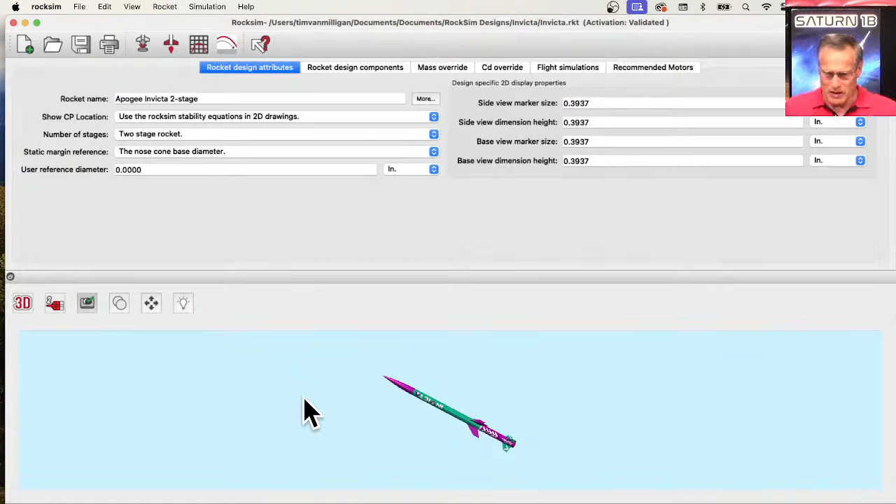You can see that it opened the design, and down here is the length, diameter, and fin span, and the mass of the rocket. If you want to see it in 3D, come down here to this button, select that, and it will re-render the rocket in 3D. With your mouse, if you have the trackball on—check that trackball button—you can use the mouse to move it around and look at it from any angle. If you want to zoom in, I'm using the scroll wheel, scrolling in to zoom.

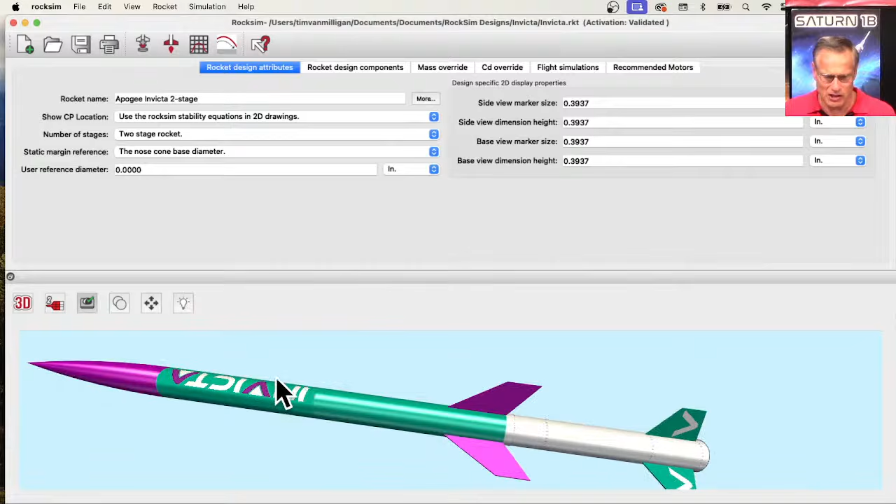If you want to shift it to the right or left, you hit the shift key and slide it with your mouse—I'm left clicking and sliding. Otherwise, you can rotate it around. You can see it has to re-render; my computer is really slow, it's getting old, I really need a new computer.

I still have the Intel chip, and now Apple is on the M4, which is like 4 newer versions than what I have. So mine is getting really old—that's why it's slow.

Anyway, we want to add a part to the database—he says a materials database. Let's say we've got a new material we want to make a fin out of, and I don't know what it is—Hollywoodium, the stuff they use in Hollywood. So we're going to make a new material called Hollywoodium. You go up here to the rocket menu, come down to Edit Database, and go over here to Materials. This is where we're going to add the new material—make the spinny ball go away. Here's all the materials currently in the database.

Let's see if I've used Hollywoodium before. Nope, there's no Hollywoodium.

To add the new material, we're going to click the Add New button right here. It puts a new line on your chart, but right now it's not showing because it's at the very bottom. So if it doesn't show up, scroll either all the way up to the top or all the way down to the bottom. This is where you're going to add your new part or new material, so I'm going to type in Hollywoodium.

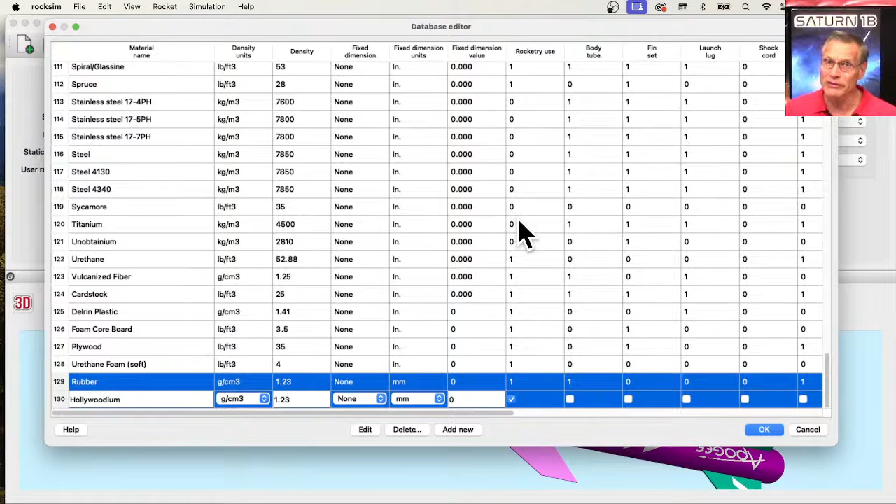So why would you not want to use it in your rocket? Well, the easiest way to delete a material from your database is to just go here and uncheck it, and it turns it to a 0. At that point, you can't use it in your design. Like here, I have titanium, but it's a 0, so it's not going to show up in any lists inside of RockSim. This is the fast way to turn things on and off. Since I want to use it, I'm going to turn it on.

Now you're going to select what kind of components can be made out of this material. So Hollywoodium - I'm not going to use it for a streamer, so I'll leave that unchecked. A transition section, maybe. A parachute, no. Nose cone, yes. Shock cord, no. Launch lug, maybe. Fin set, yes, definitely. Body tube, yes.

Let's see what other columns we have here. We have rings - I'll say yes, yes. Engine block, yes. Sleeve - a sleeve is a tube that goes over the outside of a tube, as opposed to a coupler that goes on the inside.

Okay, so now we have just added Hollywoodium into our parts database, or the materials database. So then we'll click OK. And now let's use this new material.

I'm going to go to the designs, and I want to make this fin here out of Hollywoodium. I'm going to click on it, and I got the spinny ball. Okay, so it selected that fin.

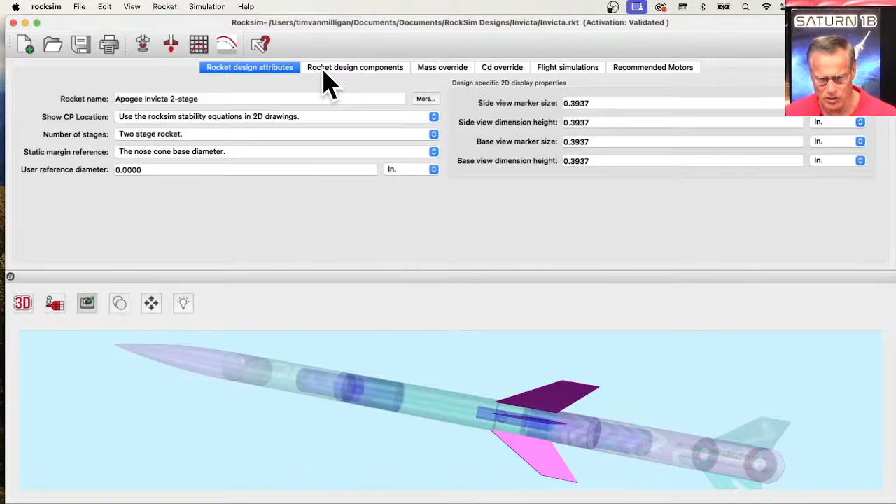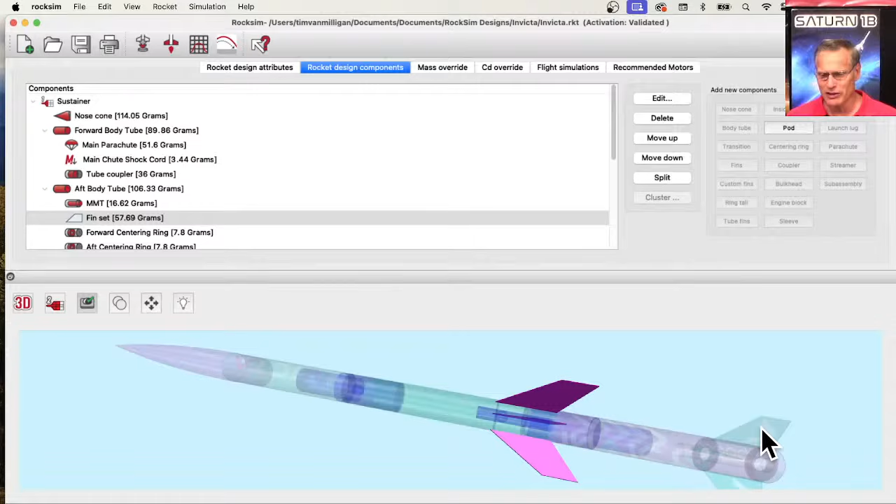Once it's selected, you can go to Rocket Design Components, and you can see it highlighted one part, and that's the part it highlighted. So if you can't find an item in the parts tree, because sometimes you see this giant list of parts and don't know what they are, you can go down to the rocket and say, I know that's a fin, and if I click on that fin, it will highlight the fin in just a second.

My computer's really slow, did I tell you that? So it highlighted the fin, and then it will highlight it in the parts tree as well. So then I can go to the parts tree and just double click on it to open it up.

And it's still working on it. Come on, still working on it. My computer's running really slow. This is my computer, it's not RockSim. RockSim is blazing fast, but when I'm trying to run the live stream and RockSim and YouTube, it's like running really slow. It's not in the back, it's kind of like hung up. Don't do this to me, RockSim.

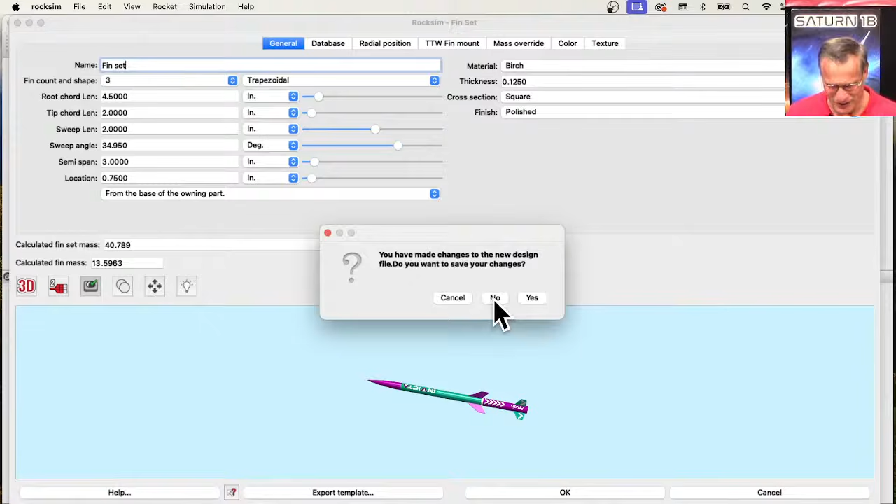Because I've just changed it to Hollywoodium. Let's see, do I have to force quit? Let's see if it's running. It says it's running just fine, but it won't let me click on a button. Anyway, I'll quit, let's see if it'll let me quit. Oh, and then as soon as I quit, it opened up the fin. No, let's see if I can hit no. Okay, so, oh, and it quit anyway. All right, let's open it up again.

The question is, does it remember that I added a part or a material to the database? Okay, so file, open. I need a design. Invicta, open.

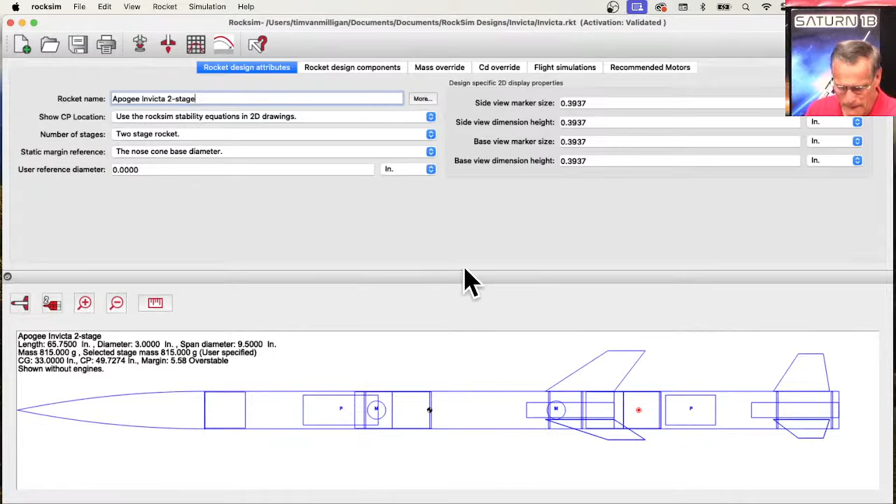Okay, rocket design components, fin set. Let's see, you're gonna open for me. It still wants to be slow. There we go. Okay, so this is the fin, I'm editing that bottom fin.

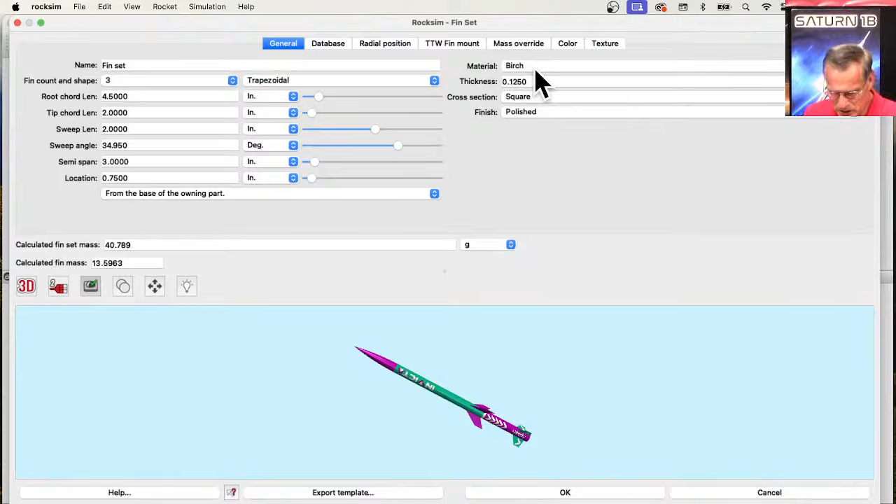And right now it's made out of material called birch. So if we click on the material and we're looking for Hollywoodium... I don't see it. Oh, there it is at the very bottom, Hollywoodium. And you're not seeing that because you can't see the bottom of my screen. But if I select it, okay, so there it is, Hollywoodium. It did select it.

Oh, and I just switched it to aircraft plywood, Hollywoodium. Okay, so when you select that, it will recalculate the mass of the fin. So now it's calculating it at 73.69 grams. And if we choose, I think it was rubber that we had before that I matched the density to. I thought it was rubber. Maybe I'm not allowed to make fins out of rubber.

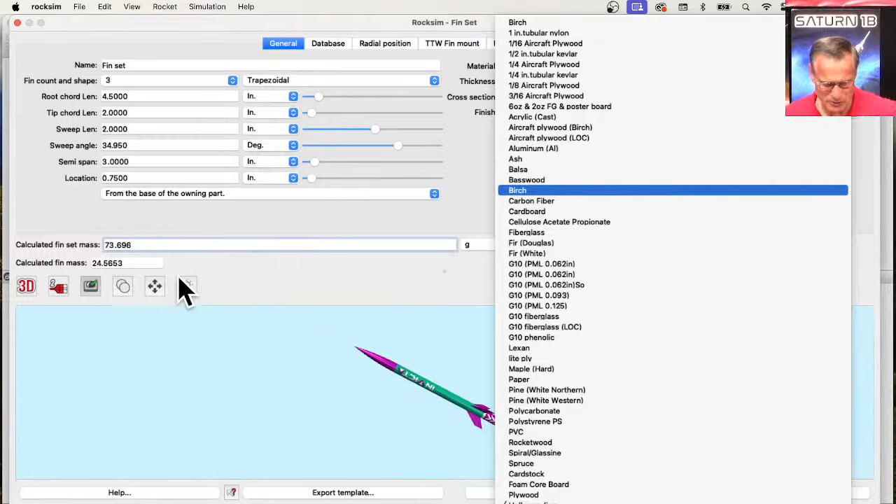Birch, let's see what birch is. Just watch the calculated fin set mass, see, it just recalculates it. So yes, it's working, at least I think it is. And then you can click OK.

Yeah, so hopefully that answers your question on how to add a material to the database. I don't know what material you're adding, but that's how you do it. This is running so slow that it's even making me mad.

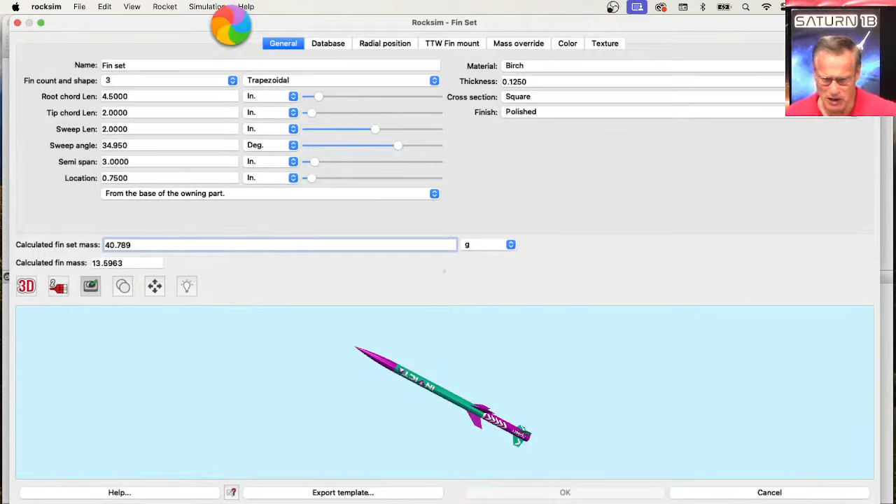Carlo says, has anyone emptied an aluminum Michelob Ultralight bottle and dreamed of using it as a lightweight fuselage? Well, there you go, you could make an aluminum rocket. And he says that Michelob Ultralight bottle looks like one of his graphite competition models. Cool.

And Rick DeFossis says article 583 has a pretty cool article. What's 583? Let's go find out, I bet it's one that Rick wrote. So we want to go to Peak of Flight newsletter, all newsletters, and then we want 583. So we scroll down to 583, motor options for clustered rockets. I think Rick wrote this one. Yes, he did, our very own Rick DeFossis wrote this article for us.

In fact, the newsletter that I was working on was referencing this article. So Rick, you get another thumbs up because I linked to it from a newsletter that's going to come out at the end of this month, I think it's the 26th. So thank you, Rick, for writing this article. Yeah, this was the one. All right, well, that's cool.

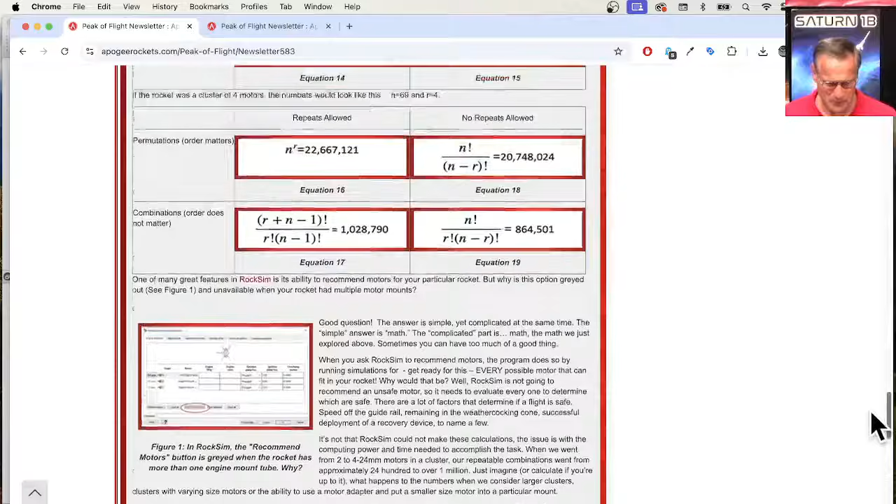I got no more questions from people about RockSim. So what's on your mind?

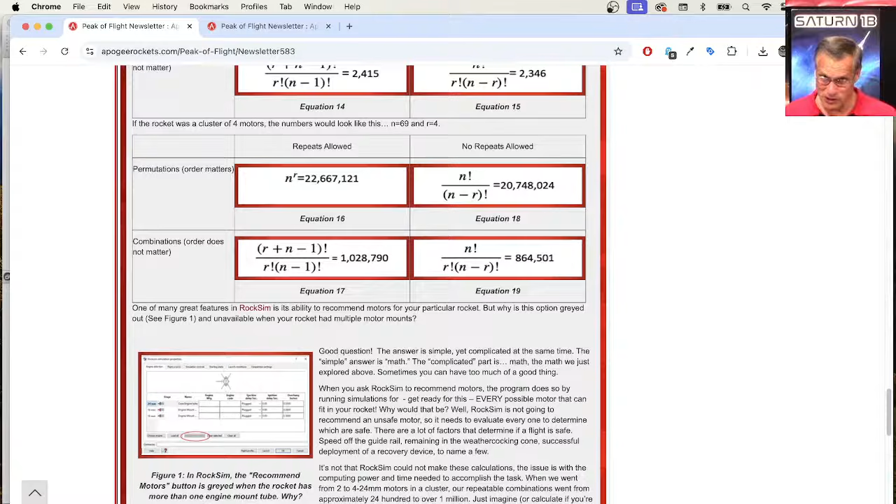Yeah, so what can I show you? Let me open up RockSim Pro. Let's see, I got a new version of RockSim Pro, and I'm still testing out some of the new features.

Quit RockSim. Do I want to save my changes? No. RockSim Pro is still launching here, still bouncing on my screen.

I'm trying to figure out what new features we've added since the last release of RockSim Pro. We're working on a lot of stuff, like canted fins, canting them at a specific point in the flight. I think I talked about this maybe an episode or two ago, and it wasn't quite working correctly, so we didn't release it yet. We also added a feature to calculate the fin flutter velocity, which is important, which is why we don't make fins out of rubber, because they would flutter too much.

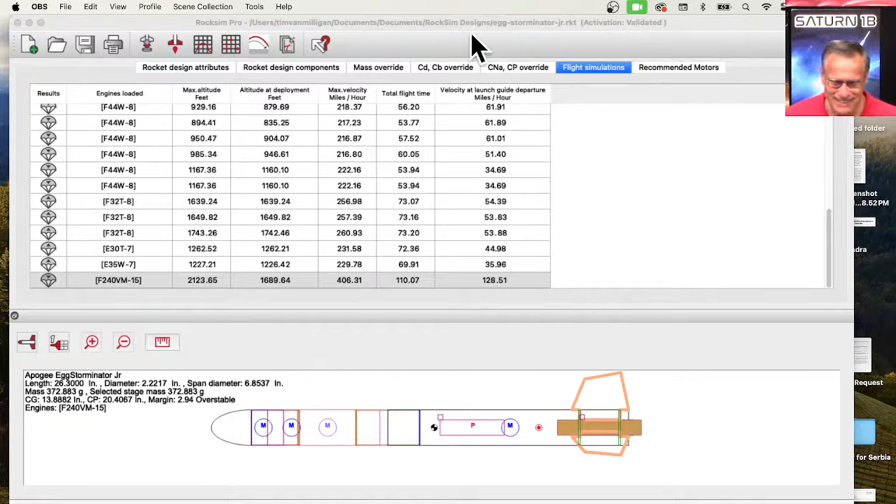So what I showed you was under the fin set, we have this new fin flutter calculator, and you tell it the maximum altitude that you're going to fly to, and it will tell you what the fin flutter speed is. I'm in miles per hour here. So at this altitude, I can't exceed 292 miles per hour, or there's a good chance the fins will flutter off.

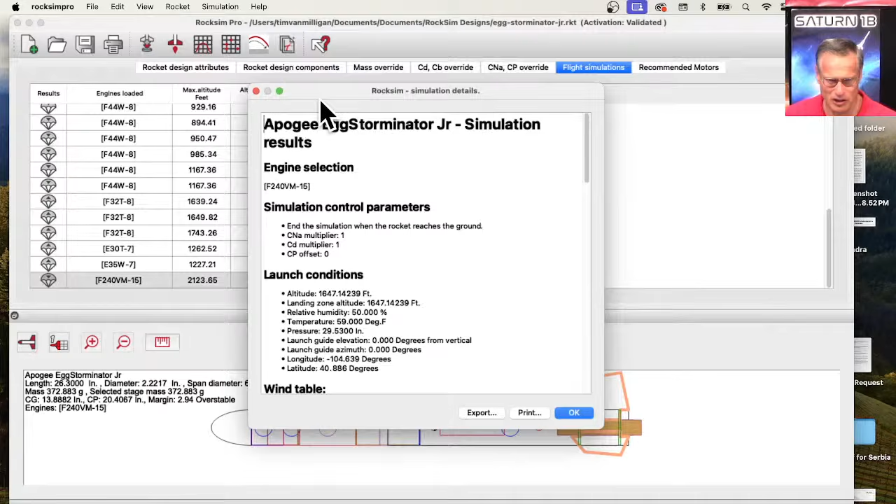And then I ran a simulation, and it looked like a normal flight. It went up and came down nicely. Then I went to the flight simulations, and I came down here and went into the detailed flight report by double clicking on it. This gives a lot more information about the rocket, and what I was looking for was a note saying, hey, my fins fluttered off. I don't see any. I did have some uncertainties.

But this is in RockSim Pro, not in RockSim. Let me see something here, what was I just thinking of. Oh, I wanted to turn off my uncertainties. I had them turned on because I was working on another newsletter article about uncertainties. Uncertainties let you change various parameters and run what they call a Monte Carlo simulation, where you set your initial conditions and then start varying things.

You can vary the direction that you launch the rocket, and you can vary the angle. Here I'm varying the coefficient of drag. But if you don't want to vary it, you set it to 0%.

So all these are set to 0%. The launch guide elevation angle, if I did 12 degrees, that's the only thing I want to change. And then how many simulations I want to run — let's just run 10 and see what happens.

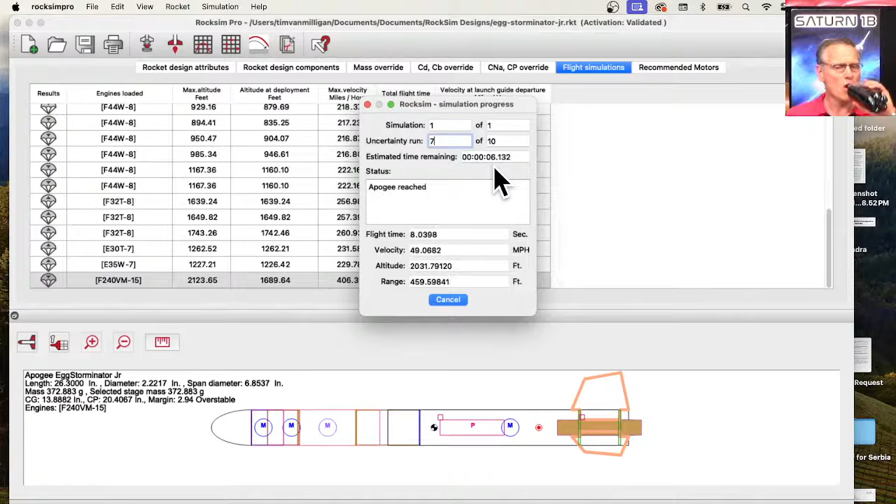Okay, so nothing really changed as far as the maximum altitude or anything. But the thing about running multiple simulations in RockSim Pro is you can do a plotting graph.

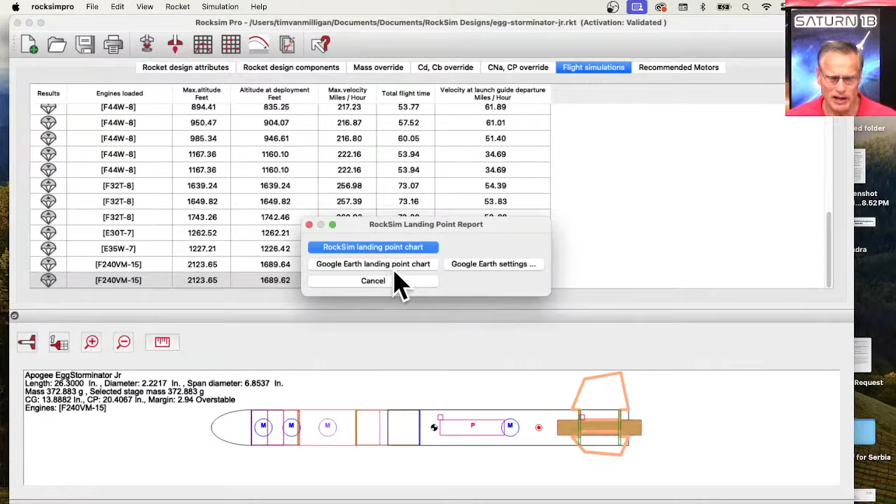And you can do either a RockSim landing chart or a Google Earth landing chart. So this is a scatter plot, and it tells me, just by varying the launch angle,

where it's landing. So the launch point is the yellow one right here in the middle, and the nominal landing point is right here.

And it looks like it's really scattered a lot, but in actuality, going from left to right, it doesn't really vary much, but it does vary distance-wise.

I had no wind on this simulation — I believe I had no wind. And so launching straight up, it landed right here.

And why didn't it land right there? Well, because the Earth is rotating underneath, and RockSim Pro accounts for that. So it landed just a little, 0.05 feet away.

So you can see going left to right, we're not going very far, but because we angled the launch rod and we used a big motor, the rocket goes really high.

You can see it could come down over 1,200 feet this direction, and 1,000 feet in that direction. And if you click on these points, it will tell you what had to happen to get to that point.

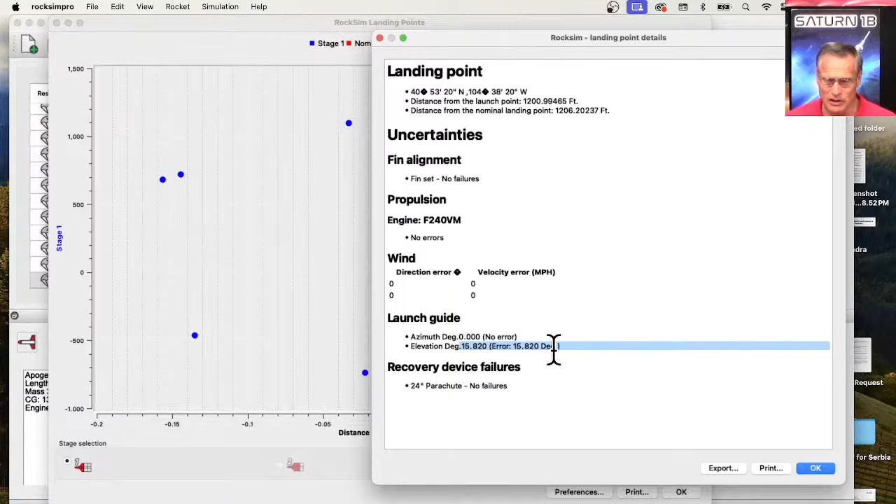So if I would have launched at an elevation of 15.82 degrees from vertical, that is the point I would land at. And if I clicked over here, this one is a minus 6.11 degrees.

So the launch rod is angled in the other direction. Like I said, this is like a Monte Carlo simulation, so you don't get to pick the numbers, but you get to kind of pick the range, and it just randomly picks numbers in there and runs the simulations.

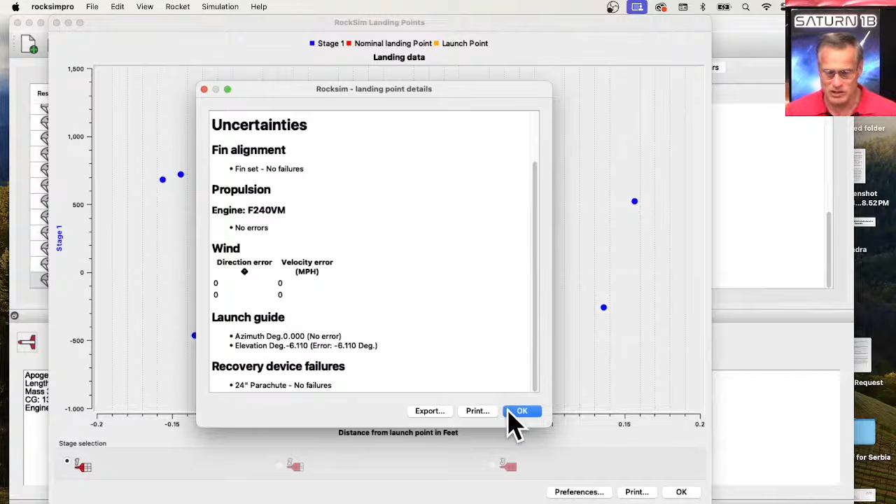And I only ran 10 simulations, so there should be 9 blue dots and 1 red dot to show the simulations — or maybe it's 1, 2, 3, 4, 5, 6, 7, 8, 9, 10.

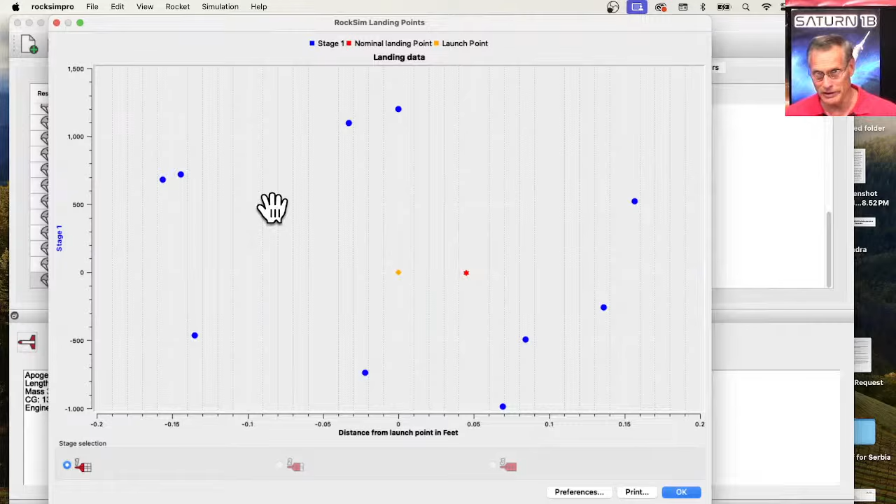So we got the nominal condition and then 10 uncertainty conditions.

And you can also, if you want — let's see if this works. I need to launch Google Earth.

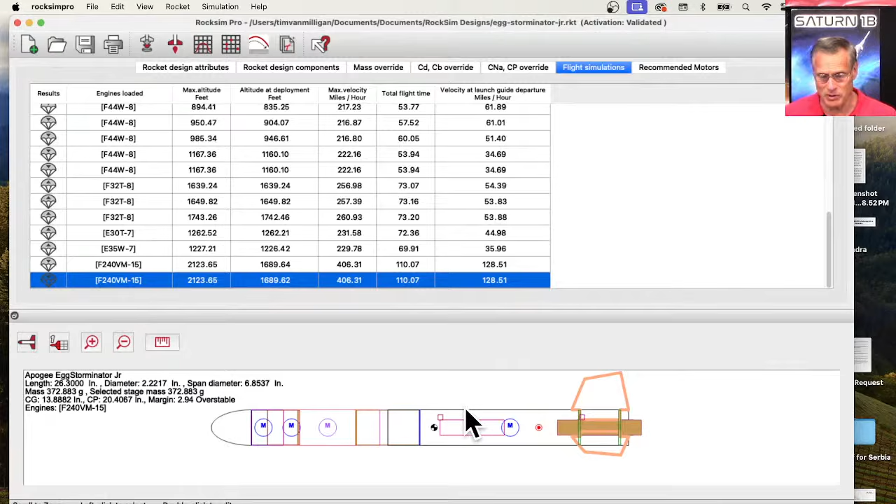You can also see the simulation in Google Earth, all those plots. So it should be like the launch visualizer, but instead of being inside of RockSim, it will be in Google Earth. And Google Earth, you can download that from the internet — that's free.

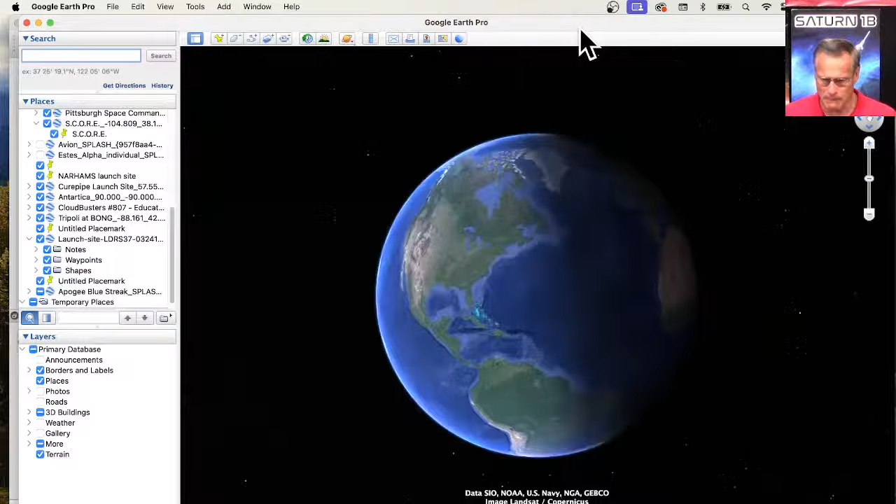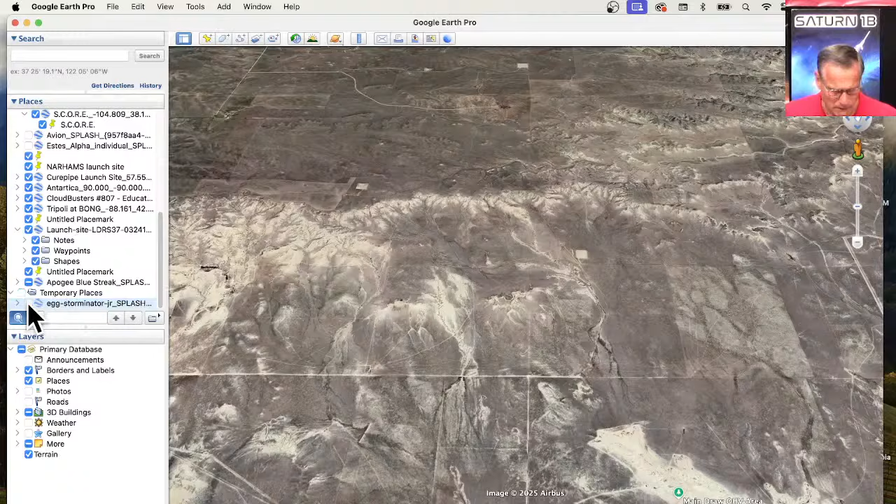Okay, so again, that looks very much like what we saw before. Why won't it let me click on these? Okay, turn them on.

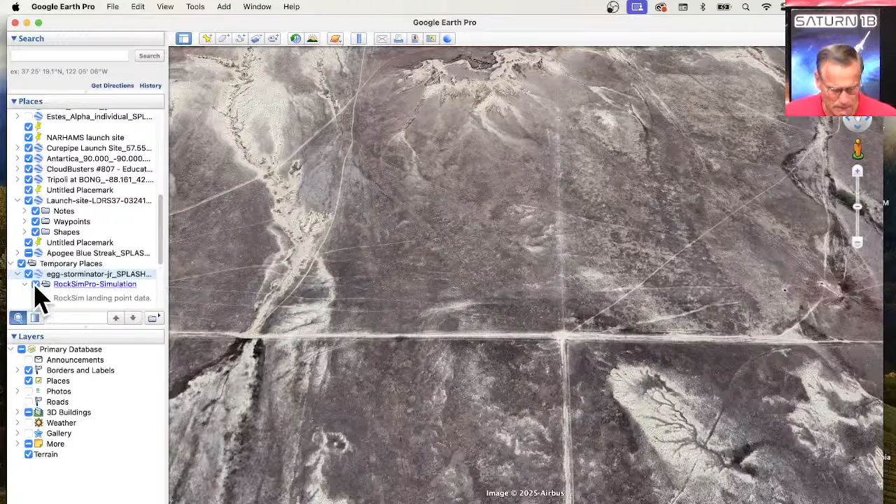And why am I not seeing these? Yeah, okay.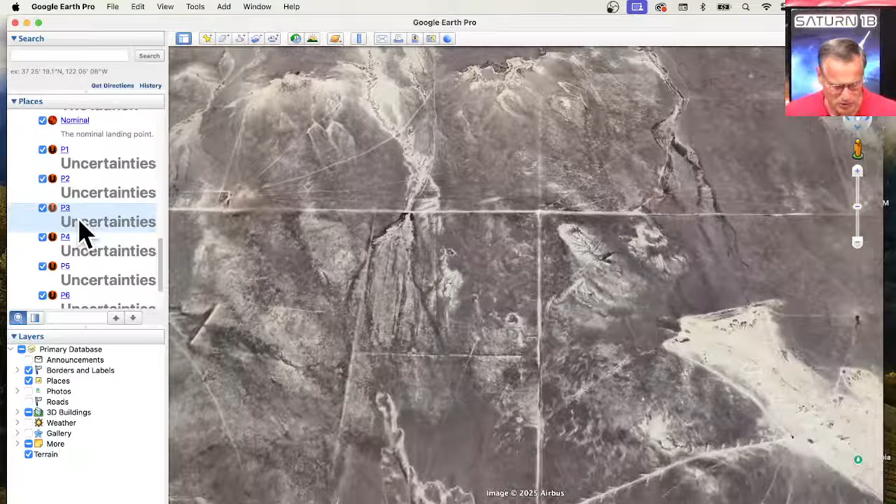Here's the nominal launch. Am I in the wrong location? I am in the wrong location. So there it is, right there.

So that's the uncertainty point number 3. And if I click on it, it brings up that same information, showing the error of 14.35 degrees off. Let me zoom out.

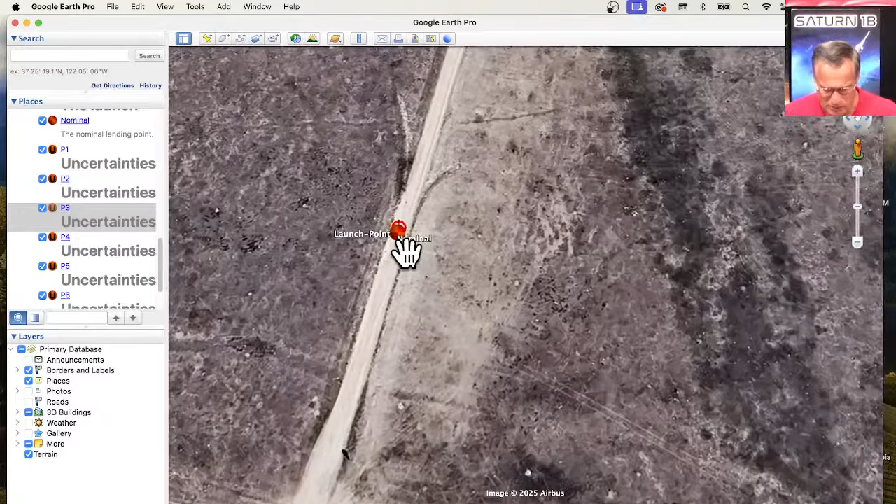Yeah, so this is the launch point, and that's the nominal landing point. The nominal landing point is, like I said, 0.05 feet away from the launch pad.

So it goes straight up, straight down because there was no wind. But once you start angling it — and this was the direction that I had it angled — it's like right along this road right here, which is kind of interesting.

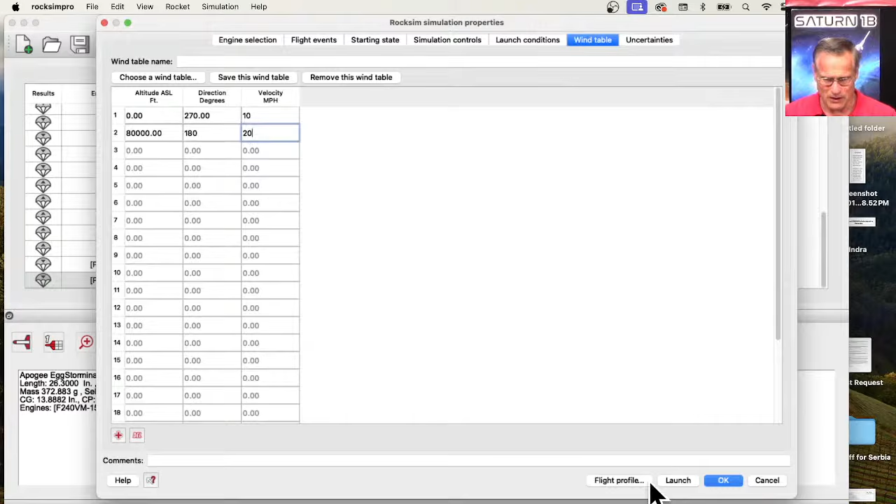Make sure my uncertainties are turned off here, make 0 uncertainties. And let's change it to a different motor, let's make it an F, that one. And hit flight profile.

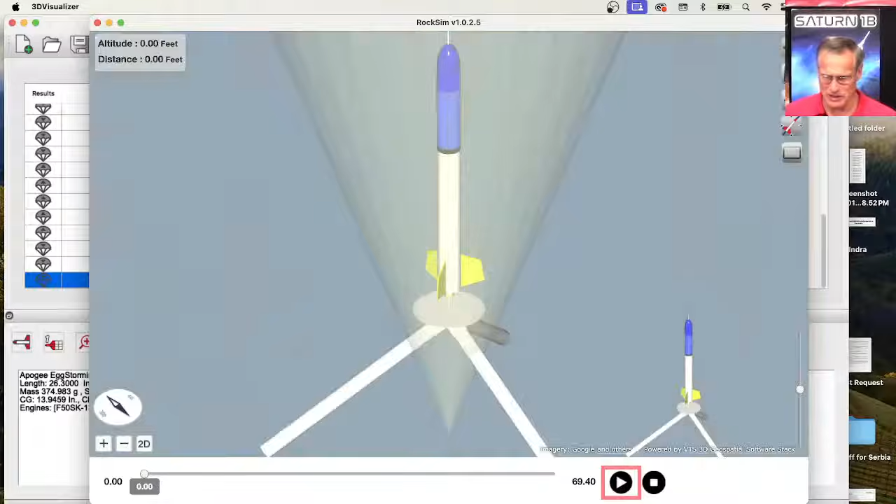When this is done running, it always opens up the launch visualizer. So the rocket's sitting on the pad. Let me turn off the weathercocking cone.

Here's the rocket sitting on the pad in the middle of the road. And when we launch it, it goes up in the air. You can see the wind is affecting it, making the rocket tilt into the wind.

We're just about at apogee. That's the apogee point, and the rocket's coming down really fast. Now the parachute popped out, and it's drifting down. It's going to take a little while, so I'm going to speed things up and make it go all the way down to the ground.

Now we want to see the whole trajectory, so I'm going to zoom out. That's the trajectory. I'm going to swing north out to the top. The black arrow down here on this compass wheel is north. Just trying to spin things around so that black arrow is in the top. Okay, close enough.

Now if we look at it from up above... I went too far. I should just hit the 2D button and it'll look straight down. Now we're looking straight down on the rocket. So the launch pad was right on the road, and it arced to the west, and then it came back down towards the east.

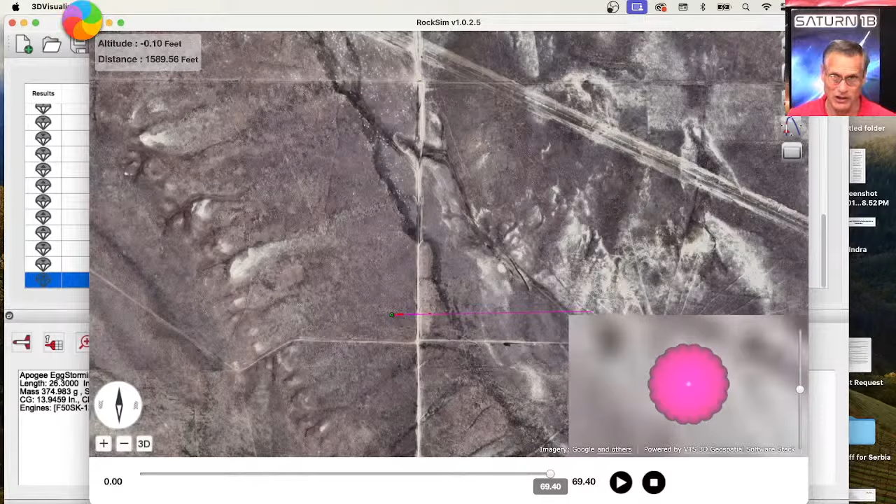But remember, our wind was set up from sea level, and this elevation here, we're in Colorado, so we're well over 5,000 feet above sea level. So if I wanted to make it noticeable, I would rerun a new simulation and change the settings. I want to see my altitude. We're currently at 1,600 feet.

So my wind table, my new altitude is 1,600 feet, at 10 miles an hour. Let's see, how high did this rocket go? 1,800 feet, so let's make it at 1,000 feet, coming out of the 180 direction. It's 1,000 feet above the 1,600, so I've got to make this 2,600 feet because this is above sea level. Then we hit flight profile, so now it's exactly 1,000 feet above ground level, with a different wind direction. And yeah, we're still hitting 1,800 feet.

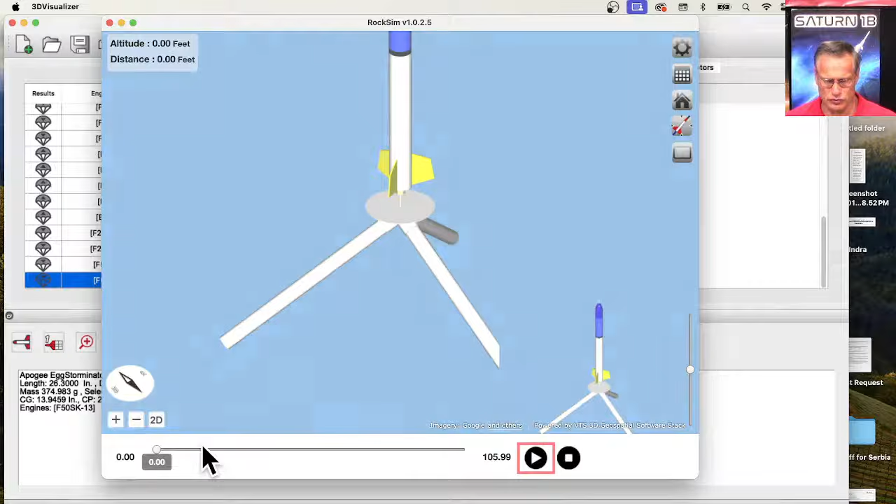I'm going to go all the way down, back down to the ground. I want to look at it in 2D, and zoom out. Now this is a different trajectory. The launch point is right there where my cursor is, right in the middle of the road. And the rocket goes up.

Here's the apogee point. Once the parachute deploys, you can see it's not a straight line. This red line right here is the ground track. This is curved because we have an upper elevation wind going this direction and a lower elevation wind going this direction. So as it comes down, the wind is shifting around, and we're getting a different wind direction, a different trajectory, as it finally touches down. So that's kind of what it looks like coming down.

Hopefully, David H., I hope that helps you out. It's going to be different in RockSim because we set up wind a little different. We can't have different wind directions at different altitudes. In RockSim it's just one constant wind, no matter how high you are. In real life, you get multiple winds and wind shear, so that's what we try to do in RockSim Pro so that it's more realistic.